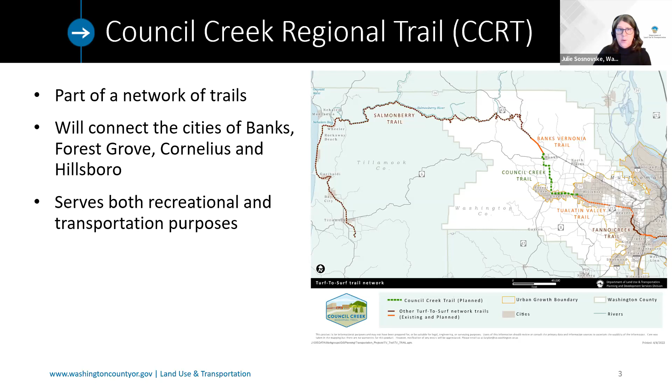I think we went through the meeting purpose and outcomes. Just a brief overview again, most of you have seen this: it's the Council Creek Regional Trails. It's part of a network of planned trails that will lead from the Portland metro area to the coast, serving both recreational and transportation purposes. We're working on the east-west portion of the trail leading from downtown Hillsboro, the Hatfield Government Center MAX Station, through Cornelius to almost Pacific University in downtown Forest Grove, running about a quarter mile north of TV Highway on the abandoned railroad line.

Reminder about the project timeline and funding. We're midway through the preliminary design project. We have a $1.5 million grant from the Metro Regional Flexible Fund Allocation Grant, hoping to wrap that up in 1 year, which is why we're having all these meetings fast and furious. Then we'll be moving quickly into our $17.5 million RAISE grant from the U.S. Department of Transportation, which will fund our final design, engineering, and construction. We also recently received another $6.3 million regional flexible fund allocation grant that has been confirmed—last time we met we weren't 100% sure. That's for enhanced crossings, pedestrian and bike crossings at arterials, collectors, and a state highway. We're looking forward to opening the project in 2029.

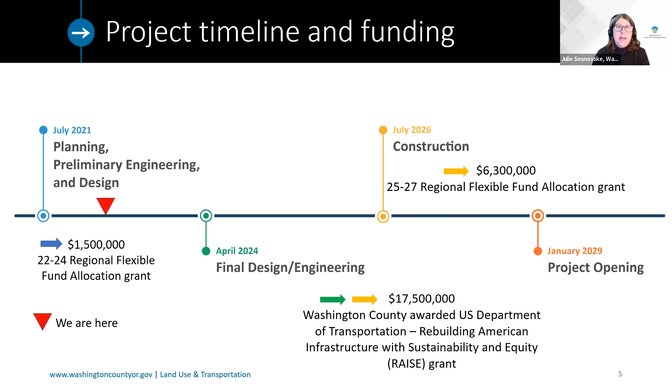Just a reminder, we have 4 major phases of the project. We started building the foundation, and now we're getting into defining the alternatives, hoping to select a preferred alternative early next year in February, ideally, and then moving into design and engineering to reach the 30% stage by the end of next year.

I want to keep you up to speed on what's happening on the project in terms of community and agency engagement. We'll be meeting with our stakeholder advisory committee for our second meeting on December 6th, in a couple of weeks. We're also planning an online open house and survey, hoping that will run basically the month of January—I don't have exact dates yet. We're also working on an in-person event during the open house to encourage people to participate in the online survey, likely at the Cornelius Library, but we're not 100% sure about that yet.

Also, we met with the Technical Advisory Committee on Friday last week, reviewing similar material to what you'll be seeing today, so I may chime in with some comments from things we heard from them as we go along.

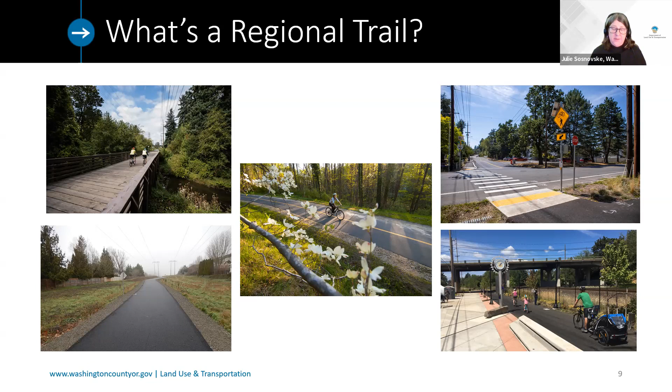And now we're moving into the next stage, which is the objectives. How can we meet the goals? The next phase you'll see later on will be design criteria and performance metrics. We won't be getting into that today, but we are going to present some draft objectives for your review and comment for each of the goals. So I'll read through these, and then maybe we can just stop at the end of each goal and see if anybody has any comments or questions.

So for goal 1, ensure equitable trail access. The objectives are to increase access for low income and communities of color, connect the trail with employment centers, education centers, public and health services. Design a trail that is welcoming and comfortable to people of all ages and abilities and new trail users. The presence of all ages, abilities, genders, races, ethnicities, and income levels are generally indicators of a healthy, successful environment. Provide seamless accommodation of universal access.

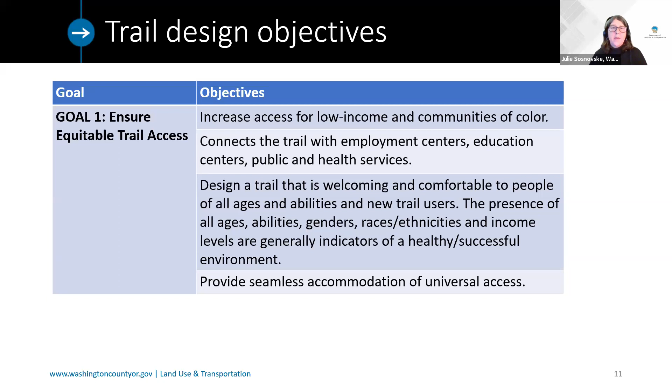Any comments, questions, proposed changes? I'll move on, and then we can talk about it at the end too if there are more comments.

Goal 2, create a safe and enjoyable user experience, with the objectives to provide safe crossings of streets by reducing conflicts with vehicles, design the trail to accommodate emergency vehicle access, provide for eyes on the trail and visibility including clear sight lines, provide enough space for people to move through the corridor at different speeds. People cycling are not in conflict with families walking. Identify opportunities to create gathering spaces and shade. Create a trail that is efficient to maintain over time.

Questions? Yes, Councilor Rippey: we don't have anything mentioning here about lighting of any kind. I think in terms of safety, there needs to probably be some criteria around lighting in particular spots.

That's a good question, and I might defer to Adrian on that. Is that something that would be more included in the design objectives when we get to that, or is that something that we should be including here? That would be in the design objectives. I think creating a safe, we could mention it as part of the goal to create some safe environments, but typically that is more on the design side. Yeah, I think going back to the slide, this is more about what are we trying to achieve, and then the lighting would be the way that we would achieve it, I think.

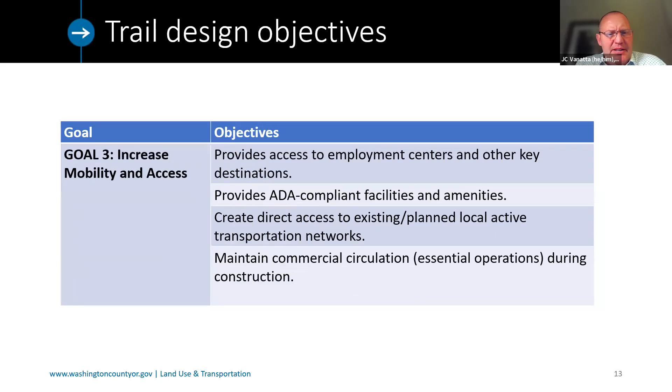JC - Julie, could you go back to the safety one? If you wouldn't mind, just go back. Sure, and I'm not trying to - this one? Yeah.

I think the other piece I wanted to add was to develop partnerships to ensure the safety of the trail. I say that because the Springwater corridor in Portland has a lot of crime and houselessness issues. So I think it's making sure we develop partnerships with community groups, law enforcement, services, community services we can rely on to help. Obviously they share in the burden, but just another note as we want to develop this trail to be the best it possibly can be. So just my couple of notes.

I think that is an excellent idea. I think that might fit more into when we get into the implementation and management of the trail. Here we're talking more about design objectives, but excellent point. Got it, thank you. Yeah, and it has an existing homeless problem in the area I've surveyed already, right? So...

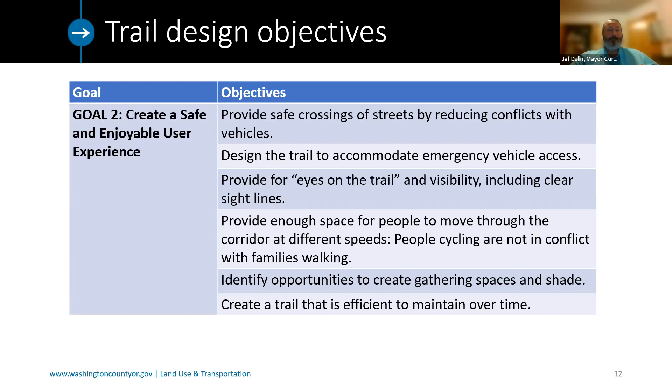Any more questions on these, or should we move on?

So I want to talk a little bit about where we are in the project, because I think we're all kind of jumping ahead on where we are in the trail design process. This was a little confusing to me, and the consultants helped me organize it in my head. I hope these slides help you organize it as well.

Right now we're making trail alignment decisions, which we're hoping to make early next year in February, winter 2022-23. We're talking about it now and hoping to make a decision early next year. This is a high-level evaluation and risk assessment, and what we're trying to identify is the alignment that's feasible, that we can construct and that best meets the project goals we've discussed.

Once we've identified that alignment, we'll develop it in further detail, which we'll talk about in the next slide. We've outlined this process, and I think we introduced it last time, where we've broken the trail alignment into 6 segments, which you'll see in Adrian's presentation. Within each of those 6 segments, we want to decide whether the trail should be placed in the north, center, or south of the right-of-way, and what makes the best sense for each segment and for the trail as a whole through the corridor.

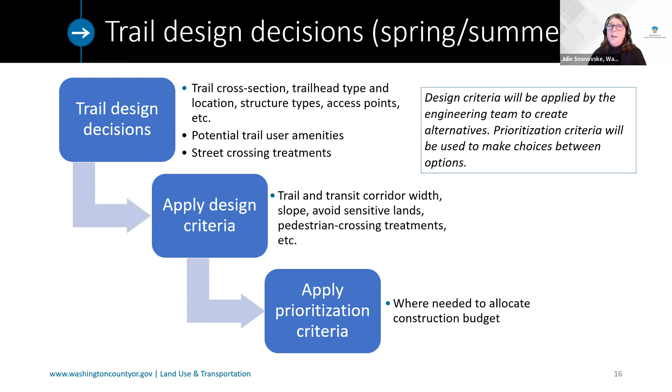Also the trail width, how we're avoiding sensitive lands, and looking in more detail at pedestrian crossing treatments and that kind of thing. Then we'll be applying prioritization criteria that we're working on, so we can determine where to allocate our construction budget. We only have so many dollars—what is the best trail we can build for those dollars? So that's just a preview of where we're going.

Bringing us back to where we are now: we're looking at the trail alignment, which is where do we want to put the trail within the corridor. Our tier 1 is prioritizing trail implementation, and some of the criteria we've come up with by segment are cost, feasibility—which could be based on a number of factors—trail user safety and comfort, environmental impacts, schedule implications, right-of-way impacts, and utility impacts. These are the first things we're going to consider with the goal of getting to construction in 2026.

The next tier would be to optimize trail and transit feasibility. Criteria we could use would be avoiding overlap between where the trail and transit would go, or minimizing future trail relocation if we decide that's what we want to do.

Does anybody have any questions on these past couple of slides?

I'll tell you what we're going to do next. Adrian has a presentation, and he's going to go through at a pretty high clip the corridor and identify many of the conflicts and challenges we might have if we push the trail to the north or the south, and also what it looks like if we put the trail in the middle. Feel free to ask him any questions, or if you have more questions on these before we move into that, that'd be great.

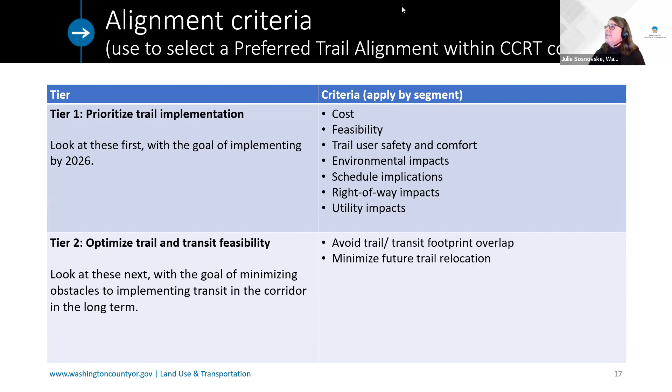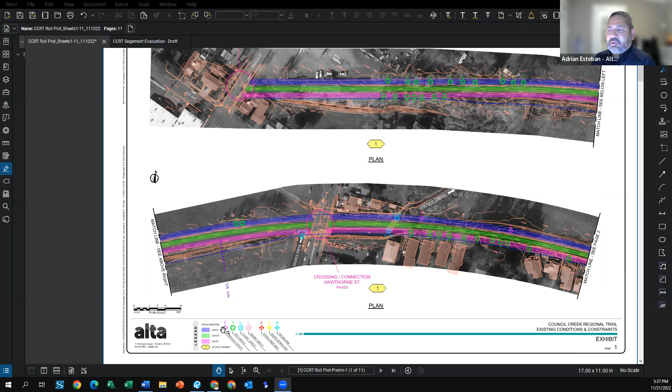All right, so I think my screen should be visible. You should see similar plans to what we went over last time. As Julie mentioned, at our last meeting we went through and looked at the corridor and identified some of the constraints, so I'm not going to go into a lot of detail. I'm going to point out specific areas where we may want to focus. I'm going to zoom in here into our legend to give you a sense of what you're going to see on these plans. There was a link to these plans on the agenda, so you can go on your own time and take a closer look. What you'll be seeing is three alternatives: north, in this purple color; center alignment, which is the green; and the south alignment, which is this magenta pink color.

Along the corridor, you'll see these diamonds in P, which is a power pole conflict or utility conflict, and trees—you'll note there are a lot of trees out there, so tree conflicts. There are existing culverts under the railroad; depending on north or south alignment, we would have to extend those culverts. Grading conflicts will happen primarily near the trestle area. As part of the railroad, there was a grade increase to get up and over Dairy Creek, so there's some grade differential between the track and the north and south alignments. There'll be some grading needed there, particularly if we're looking at realigning as we cross over Dairy Creek. Encroachment areas were identified at our last meeting as well—we'll dive closer to look at some of those impacts based on the alignment. This yellow, which is a little hard to see, represents building setbacks. If you recall, there were some buildings right up on the property line, so those will need some sort of setback away from the face of those buildings. There's also some wetlands and bodies of water that will be impacted depending on alignment.

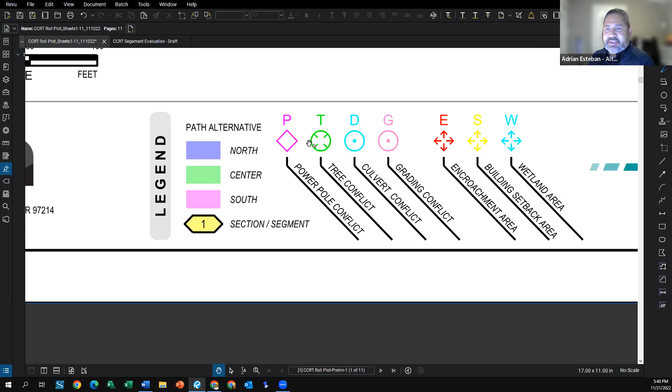Thanks, Julie. If you see any other hands, let me know, because I'm kind of focused on the drawing. I'll step back here and show—as Julie mentioned, we broke this up into 6 segments, roughly about a mile each, but there were some clear division lines and clear issues that were part of each segment. One segment was particularly focused on tree and power pole impacts, another was focused on items such as the trestle, and others may have property encroachments. We broke them out at good division points, as well as trying to focus on specific issues that may be impacting the project.

So segment 1—yes, at this zoom it's just a smear on the screen.

I'm not sure, maybe you've got an 85-inch big screen you're playing it on for yourself, but the rest of us human beings, that's pretty much just a smear.

Is there any chance we could get a little better zoom in? I'm about to zoom into that. I was just going to give a lay of the land here.

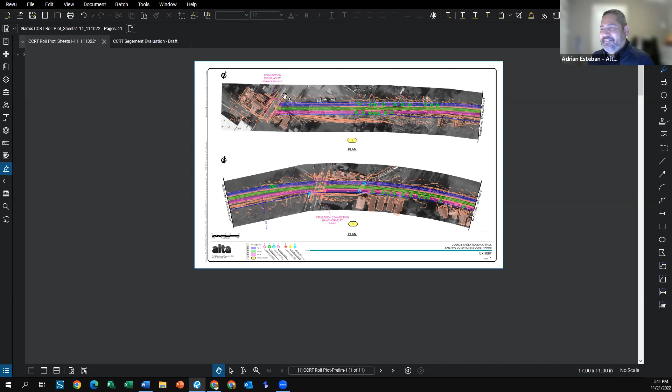So our first segment begins at Douglas Street here, and you can see the blue, the red, the blue, the green, and the pink. You'll notice we're seeing a lot of trees in this segment, both north and south of the railroad, which is typical through segment 1. We're going to see a lot of tree impacts through segment 1, these green T's.

As we continue to the east, crossing Hawthorne Street, this is where power lines begin to appear, overhead power lines. So through segment 1, there's a culvert here, but primarily trees on the south end, power line on the north end. That is the difference between the two alignments, and obviously the center is the railroad. So we're on the railroad alignment.

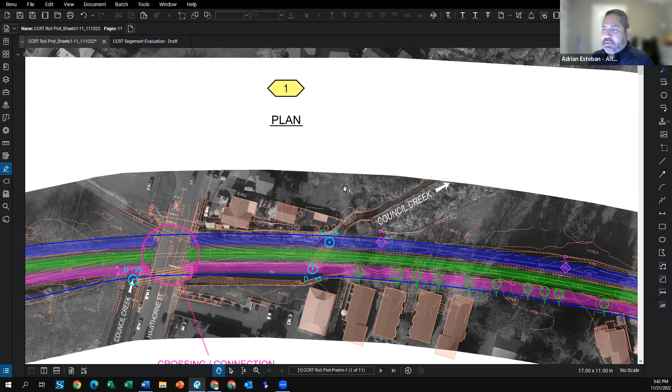One thing to note in this particular segment is Council Creek. Council Creek is on the north end, comes through these culverts, goes parallel to the railroad tracks to the south under Hawthorne Street, and then continues on the west side of Hawthorne Street.

So one thing to note in this particular location is that a shift in alignment from the center to the south would require some sort of structure to be directly over Council Creek. This pink area is where Council Creek comes underneath the railroad and parallels the railroad, and under the road back to its original location on the west side of Hawthorne Street. So that's a major impact. Just wanted to point that out, that we would be directly on top of where Council Creek parallels the railroad.

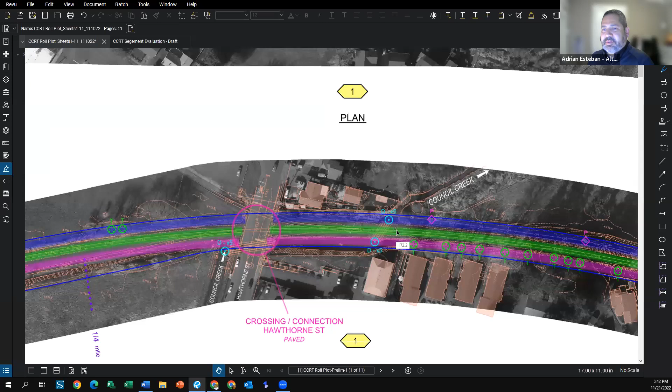I'm going to zoom out and go on to the next sheet, and I'll zoom into specific locations as we go.

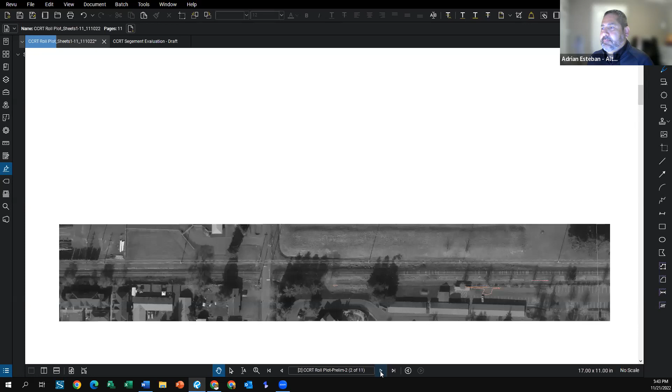As we continue to the east, we have one culvert, again power poles on the north, trees on the south. We do have to look at some encroachments that you're starting to see, and we noted those last time, about 90 feet of encroachment. Here, it looks like people are parking vehicles and they might be using this access around the property. No visible structures, but there is usage there.

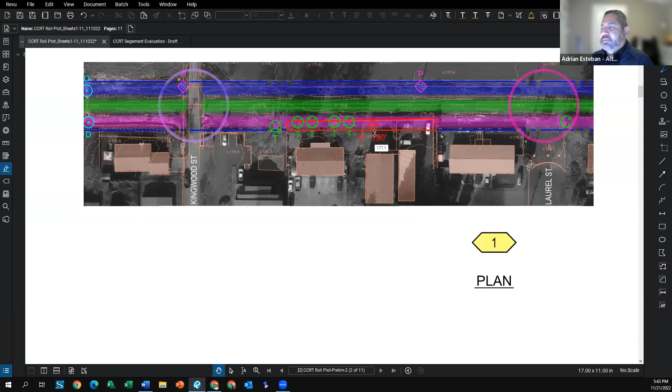As we continue to the east, again trees on the south part of the alignment, power poles to the north, another culvert. Street crossings will be the same regardless of which alignment. We'll have to improve the crossings there.

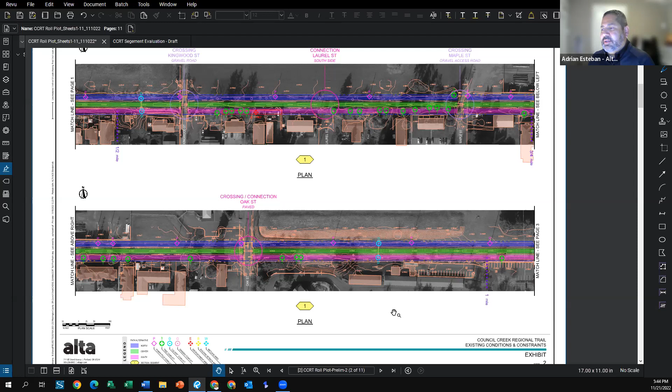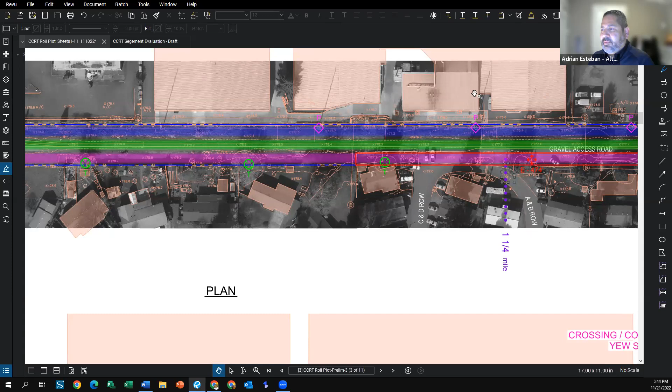As we get to segment 2, this is where I mentioned the division, Oregon Highway 47. This is where we start to get setback issues. You see the buildings that are right up against the property line. So still trees to the south, we have encroachments on the south side, and we've got buildings on the north end of this segment. So those are the things that we are dealing with.

And here we start to see some structures, just corners of structures that are on the property line, inside the property line. But definitely much more impact on both sides, north and south.

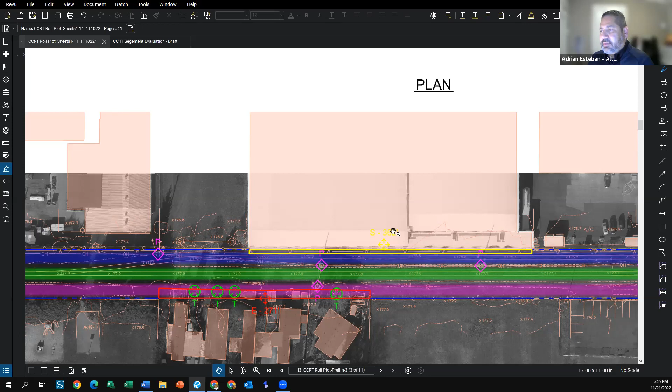Here we've got setback issues with the frontage of the buildings right on the property line. We've also got structures on the south side that were within the right of way. So this area to the south, where you see trees, you also see some small structures. And then north of it, we have not only power lines, but we've got buildings that are right up against the property line.

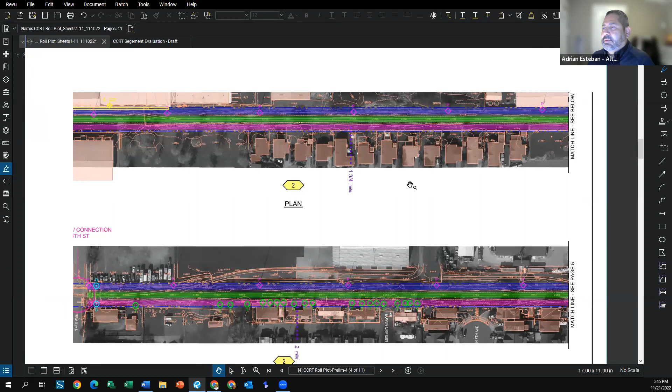As we head east, similar issues. We start to get into areas that have more residential. Again, power lines on the north, less trees to the south, but we're near property line with no encroachments. But we do have some on the north side, some buildings with setback issues.

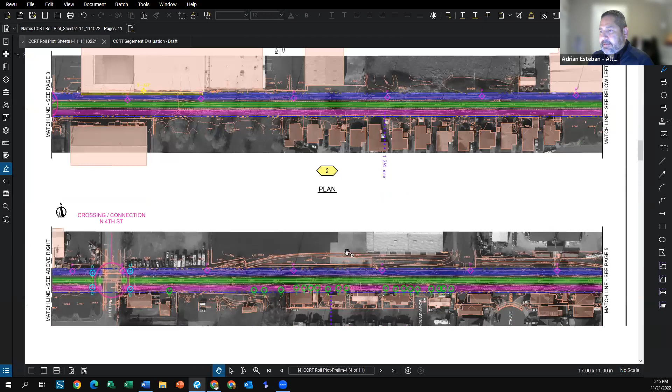As we continue east, crossing 4th Street, trees, a lot of trees on the south end, and then power lines on the north. A couple of culverts near the intersection there. So similar issues that we're seeing throughout the corridor.

And Adrian, those aren't just regular old power poles, are they? Some of them are high tension. They're really high voltage. I believe there's some areas that are high voltage transmission areas, not your standard residential power lines, it's a lot higher transmission.

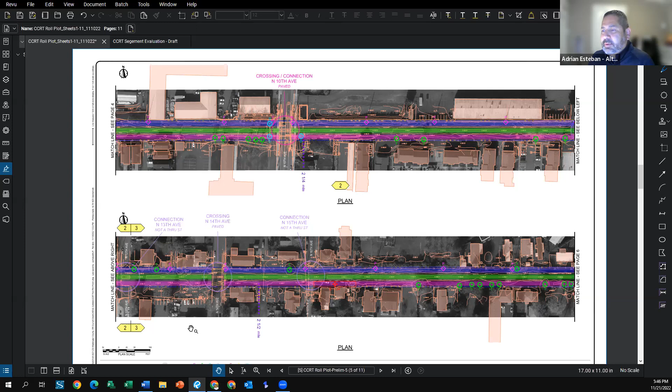As we continue through core segment 2, again, similar issues: proximity to existing buildings, trees, power lines. Then you'll start to note more residential, more high density areas as we approach segment 3, and we start seeing additional encroachments.

So in addition to power line on the north and some trees, we start seeing additional encroachment through segment 3, right around 15th Avenue. This is an area that looks like there are connections between the different buildings and structures that are there.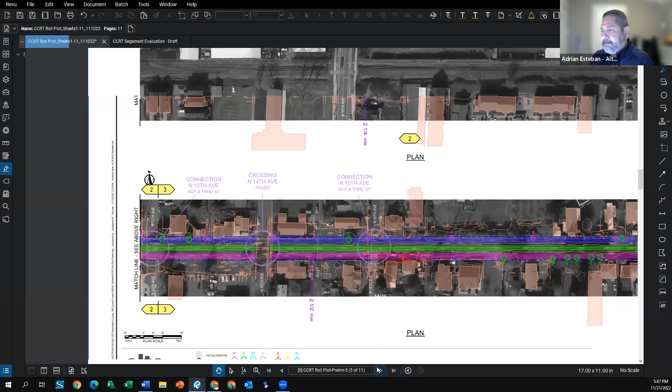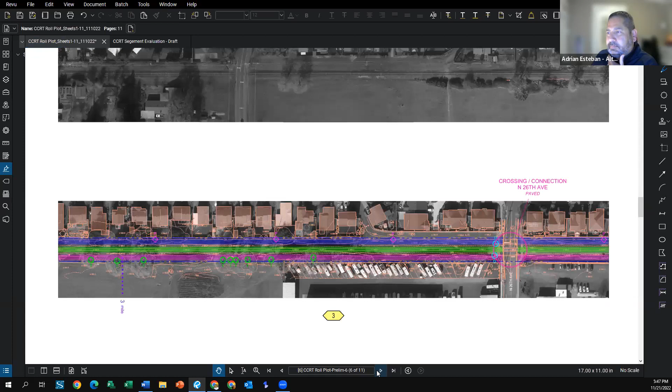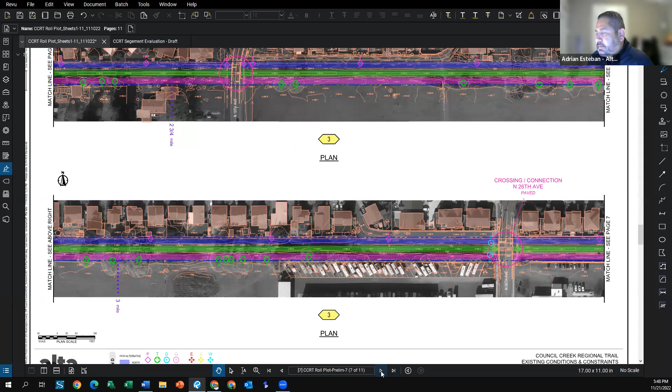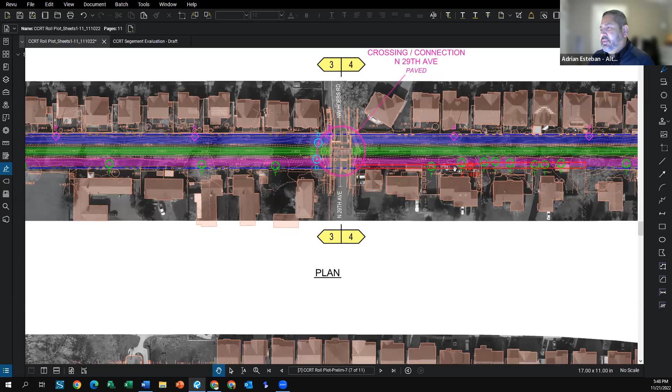As we continue segment 3, again trees on the south, power lines on the north. As we approach North 29th Avenue, there's a division between segment 3 and 4. In segment 4, we're starting to see a lot more density, a lot more encroachments, including some structures through this area.

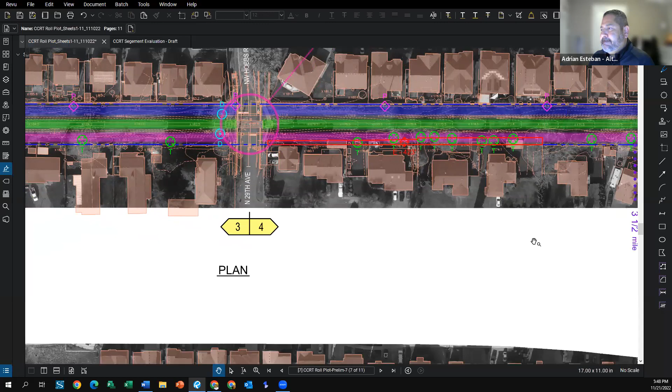So Adrian, if I could jump in here just a little bit, because I'm going to have to jump off in a minute. Those property owners that have structures and obstructions in the right of way that is not theirs, is that going to be their financial responsibility to move those?

Yes, I believe so. I believe they are within the right of way, so they would have to vacate it because they're encroaching. I think Julie had looked at whether they would be allowed to remain, and the railroad has the easement there, so they would have to be relocated, moved out of the right of way.

Yeah, there is a statute. If somebody wanted to call them on it, they would have to move what they have encroaching in the right of way because it is a railroad. Railroads have that authority, the county has that authority, and I believe the state has the authority. The right of way is owned by the state, but because it's an easement of the railroad, there's definitely authority at this stage. It may depend who owns it, but I believe all the entities likely to own it would have that authority to require them to move it. It doesn't mean it's easy to do.

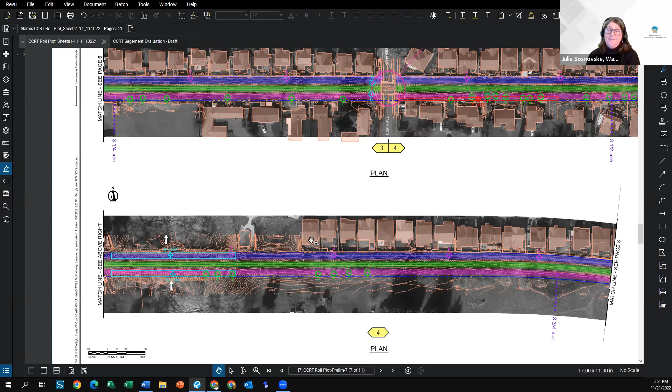So as far as notification, are we planning at some point reasonably soon to put everybody on notice that we're looking at trail alignment, possibly having to remove those structures? What's our communication going to be to put everybody on notice? Well, we haven't got there yet, and I'm not sure we necessarily would do that if we build the trail down the middle. I don't know, I would have to get instruction to do that.

I think we're going to have to dig in pretty deep on that and make sure we're in the right spot, because some of those on the north side, east side of 29th, those homes were built, and there may be some question of where the property and the easement actually is. On not just east of 29th, there's one minor structure in the right of way, and there's this home set back probably 5 feet from the right of way line.

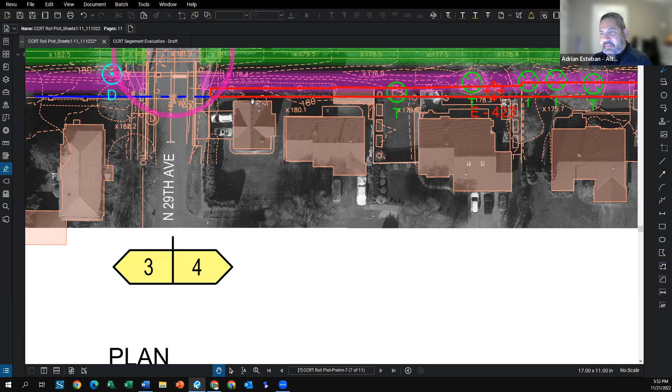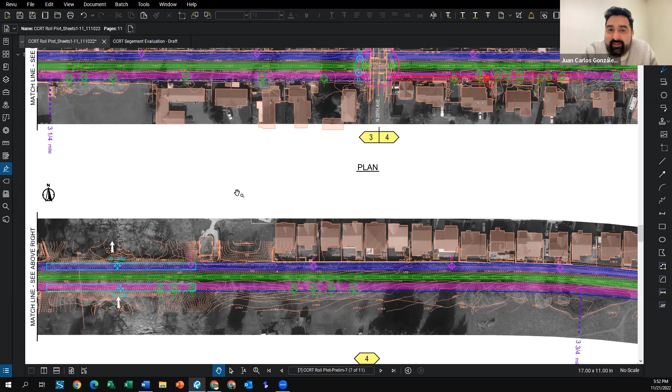If I could just ask a super basic question, one of the first projects that really gets into the weeds, parcel by parcel like this, how does this happen, just gradually over time? Obviously there's no nefarious intent or anything, but it's fascinating that there are patches like that.

That's why I brought it up, Juan Carlos. I think we may have a surveying error or something, because those homes were surveyed in and built by Loringer, a reputable builder in the area. That's literally my neighborhood, I'm just around the corner, just out of frame on this east of 29th area. So I think we're gonna have to dig in and make sure we're right when we ask this question, because all of that was surveyed in and it's all part of the record. We need to be 100% sure on where the line lies before we start stirring this pot.

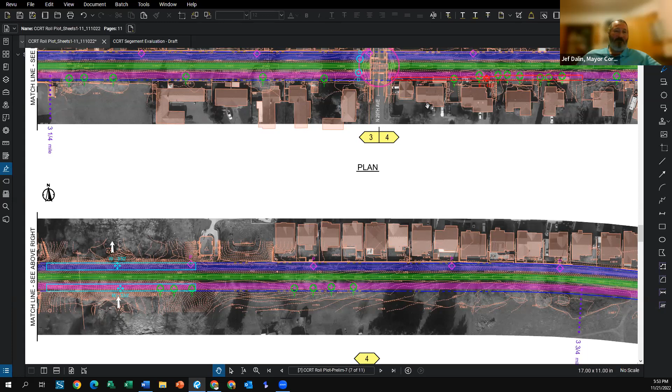Just so you know, the survey that was done used a lot of the survey records that are out there for the easement. But I agree that we want to double check and confirm that.

One last question before I jump off. If we chose the rail line itself, which in this slide would be green, would we incur significantly less issues along this line initially in building the trail, and then 10, 15, or 20 years from now when we want to add other multimodal elements, we'd have to deal with those then? That's correct. That's possible if that's what we chose to do.

It's a choice we could make. But we're not making that decision today, right? We're not saying we're going to choose A, B, or C.

No, all right. Well, thank you very much everybody. I'm sorry I have to jump off, but I appreciate everybody's attention to this. This is obviously a great project, but it has some complications as well. It's no different than the Salmonberry Trail, quite frankly. We've got encroachments all up and down the Salmonberry that we're going to have to deal with as well. So thanks everybody, I'm going to leave you now and turn it over to Mayor Dalin.

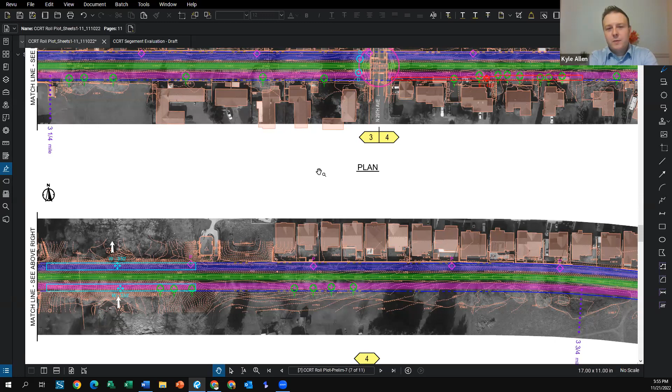All right, thanks. Looks like we got a question from Kyle. Piggybacking off what Jerry just said, it seems like most of the structures in the right of way are coming from the south. So if we focused the trail on the center or center-north, and were to build it, you mentioned the authority of the railroad is probably greater than the authority of the state. Would we put ourselves in a situation down the road where we wouldn't be able to ask those folks to remove structures in the south if it wasn't the railroad's right of way anymore?

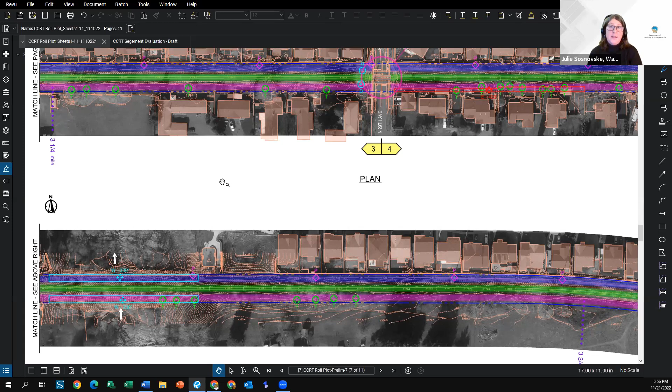I don't think we know who will own the right of way. I know the county has the authority if the county owned the right of way. TriMet has the authority if TriMet owned it. I believe the state has the authority too, although I'm not positive about that. So most of the entities likely to own the right of way would have that authority.

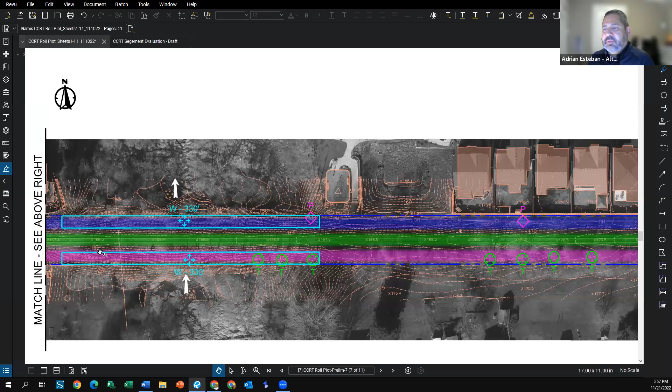All right, thank you. If there are no other questions, I'll continue through these segments. We're now in segment 4, east of 29th. We showed those encroachments, but we also have some wetlands we're dealing with, about 330 feet north and south of the existing corridor. This is an area with environmental impacts, and we have to do mitigation for any impacts to the wetland. It may require a structure like a boardwalk to minimize impacts to the wetlands.

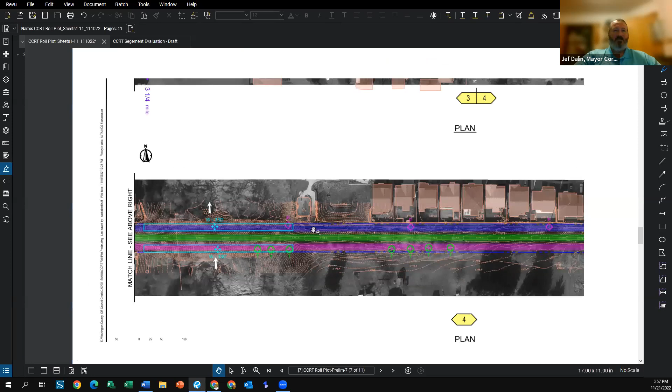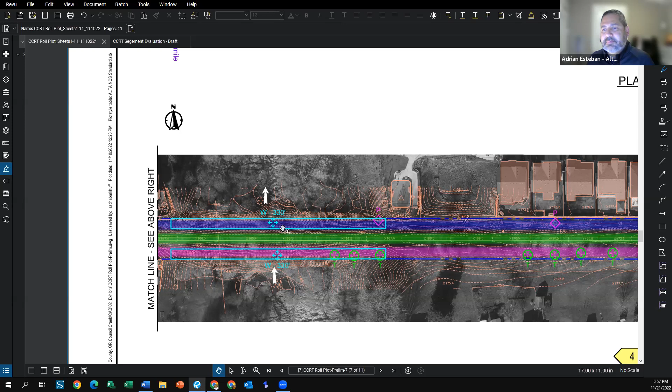And that's where the first trestle is, right? Or what are we considering that? This is Job's Ditch, and there's an existing culvert that goes underneath the railroad, so there's wetland on both sides. The trestle is further over to the east. Right now the only structure here is a culvert.

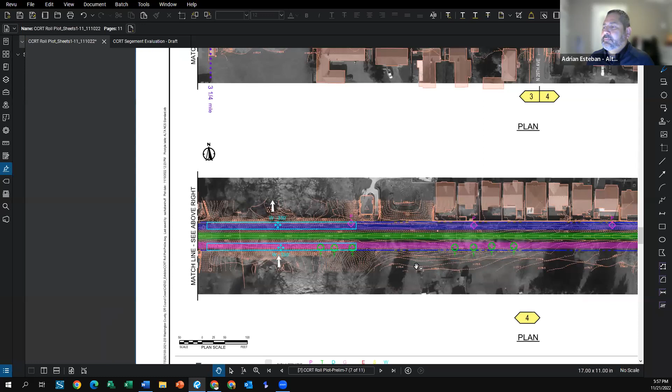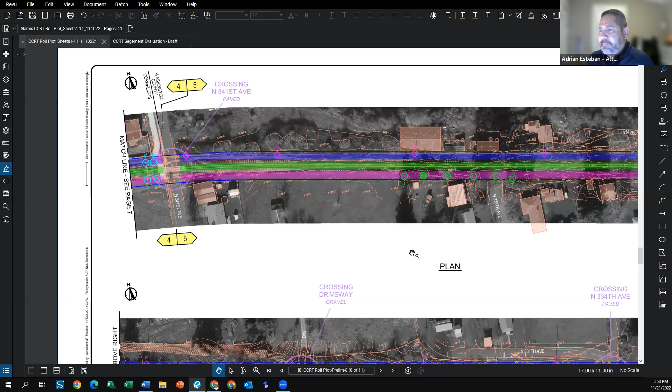So segment 5 starts at 341st. This is where we start approaching the trestle that was mentioned earlier. In this segment, we've got the same power lines to the north, trees to the south, and it starts to become less densely populated.

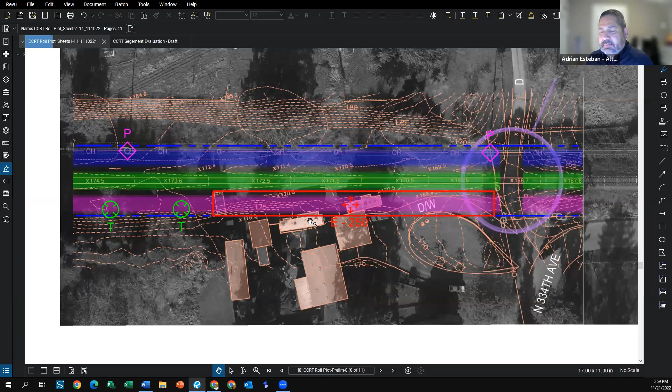There are some encroachments to the south as we approach 334th. There's a structure, I think a mobile structure, possibly a mobile home, that can obviously be moved but is currently placed within the right of way. There's a dirt road providing access to this area, so somebody is clearly using it as an access road through this property. There's another structure here slightly into the right of way, which I think is also temporary or at least a minor structure in the right of way.

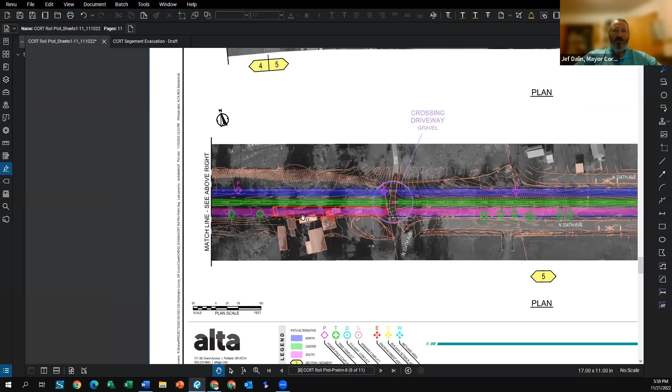And that other one, what's a corner of a garage, I think, that sticks into the property? Yeah, from being out there, I think it's some sort of temporary structure, maybe a mobile home, that is encroaching into the property.

But that one just to the right of it there? Yes, I think he's talking about the one under the E250. This one here, square, yeah. There's a corner of that building, this corner is in there as well. And I can't remember if this is a shed, like a metal roof shed.

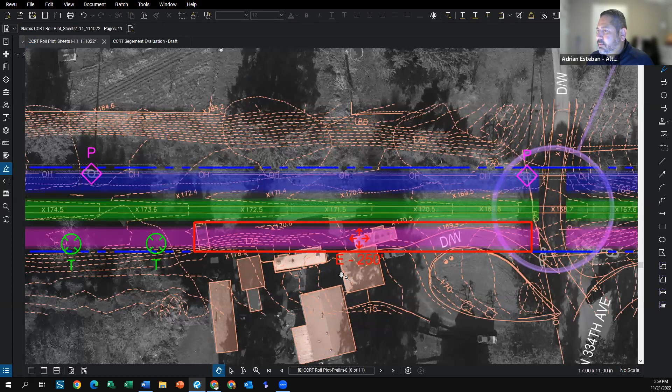And then we've got the driveway that goes underneath it right next to it, right? Correct.

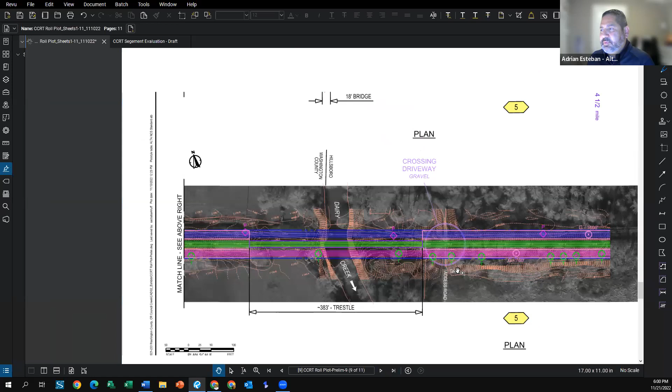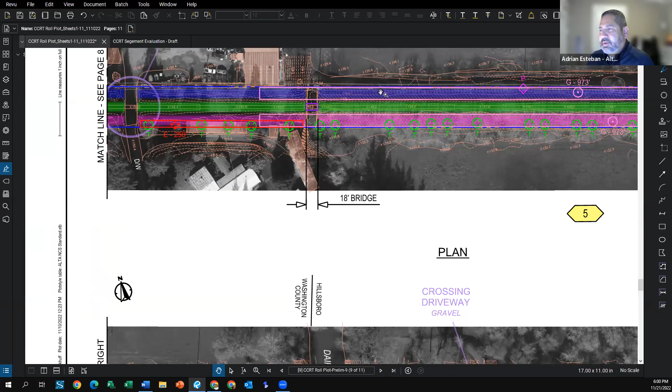So Dairy Creek, this segment 5, as we approach the trestle, we have a short bridge. There's an existing structure now along the railroad line. So if we were shifting north or south, we'd have to provide a new structure. There's also the area just to the north and south of there.

This is maybe potentially wetland or sensitive area as we approach Dairy Creek. And a lot of trees, you'll note, to the south.

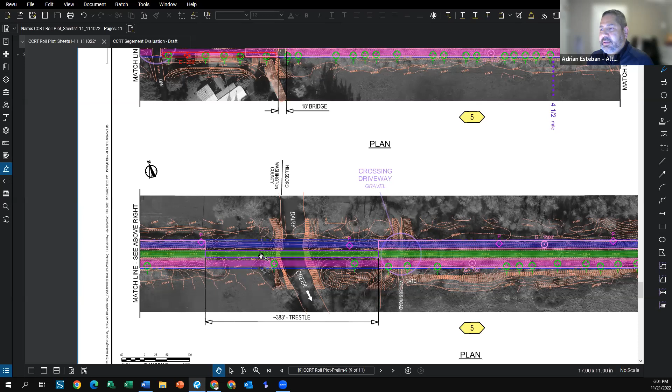And then Dairy Creek, as we approach it, there's a 383-foot trestle existing here in the center of the right of way. That, as was mentioned previously, would require upgrades to be able to utilize it. The structure is many years old, many decades old, so obviously there's going to need to be improvements in order to utilize the existing structure.

This is where, when we're looking at something like this, where you're going to spend a lot of money to upgrade an existing trestle, its useful life may be limited because of what's already there. And even if we do upgrades to it, there's still going to be some limits to what can be done. This is an area where you'll have to decide, does it make sense to shift this north or south, put in a new structure?

One, obviously a longer lifespan, but also if we're going to take the expense of building on top of the existing trestle, would it make more sense to shift it north or south? Also providing for high capacity transit in the future, not to have to reconstruct a structure. Those are the things that must be considered.

If we maintain the existing alignment, at some point that will have to be removed if there is high capacity transit in the future. And the north side, those diamonds are the power poles, and the trees are on the south? Correct.

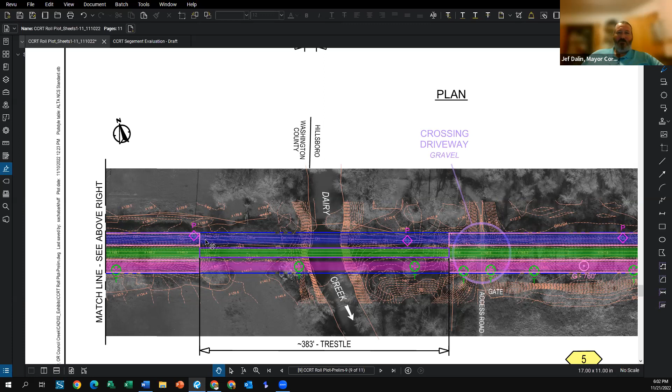And then the other thing we'll look at too as part of the design, depending on the alignment selected, is if we go north or south, we'll do some grading, and that's what that pink box is. I thought it was wetland, but no, that's grading.

As the railroad had to increase to get up and over the creek, there was some severe grading that happened through here. So north or south, there's quite a bit of grade difference between the railroad line and the existing grades. So there would be a similar type of grading that would have to happen to get up and over to put a structure over the creek.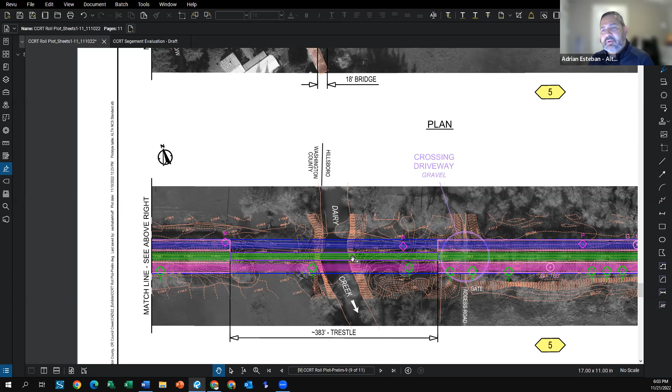So there's a minimum clearance that we'll have to have over the creek with our structure. So through this area, where we have the 18-foot bridge, we'd have to slowly start to grade up and over Dairy Creek.

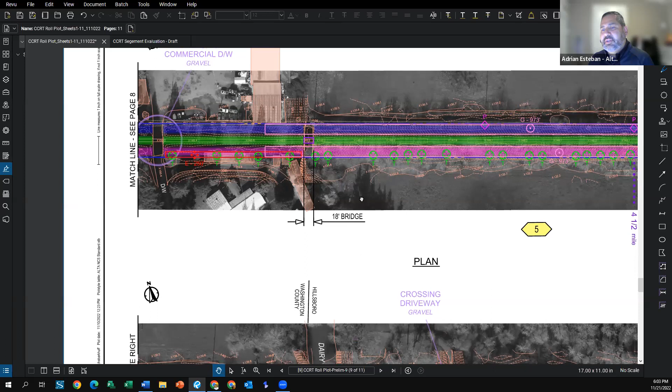So segment 5 is dealing with structures, potential structures, new or refurbishing existing structures. And then we start approaching Hillsboro.

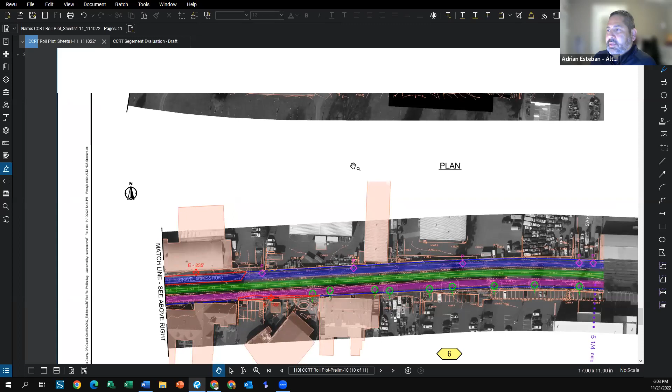Again, trees and power lines to the south, some grading that would happen. On the north side, there's more grading that needs to happen based on the grade differential that's there now. Start approaching commercial buildings.

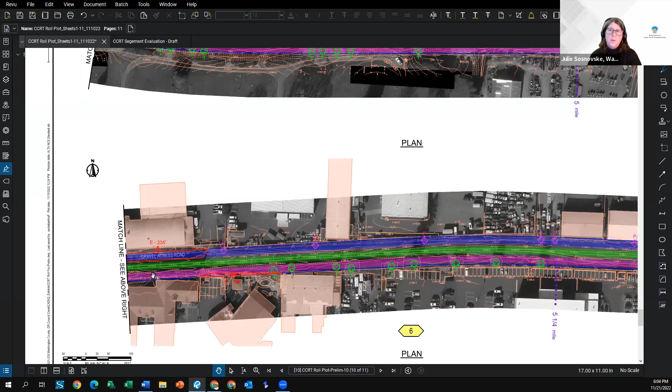With those grading issues, Adrian, is it possible that we would get into needing right-of-way easements adjacent to the right of way if we pushed it north or south? Correct. So depending on the grading that needs to happen, there may be structures such as retaining walls needed to avoid going into properties and needing easements. But because of the grading situation, there may be additional structures that are needed.

And then continuing on from segment 5, that ends at Main Street. Segment 6, the final approach.

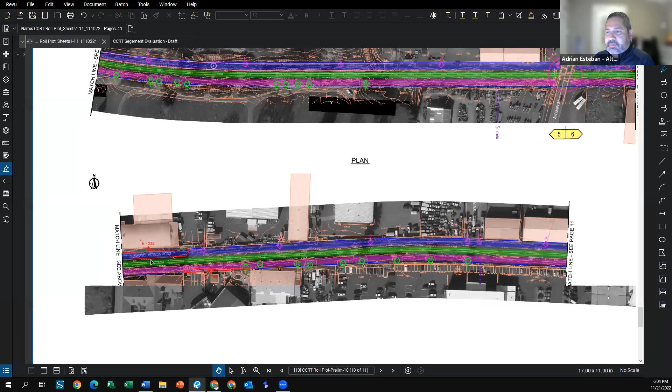We have a gravel access road that's being used for access to this commercial property. So there's a gravel access road here that is in the right of way, and then we've also got some minor encroachments as well on the south side.

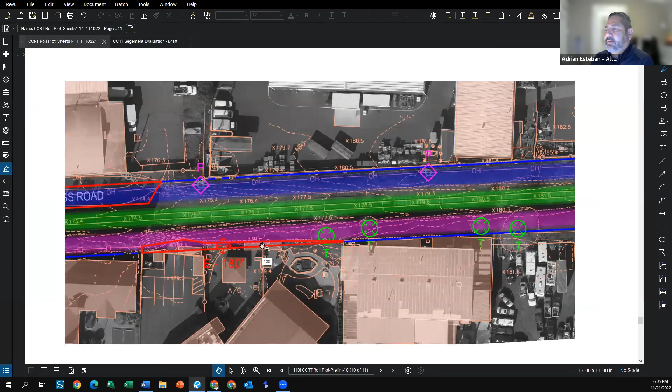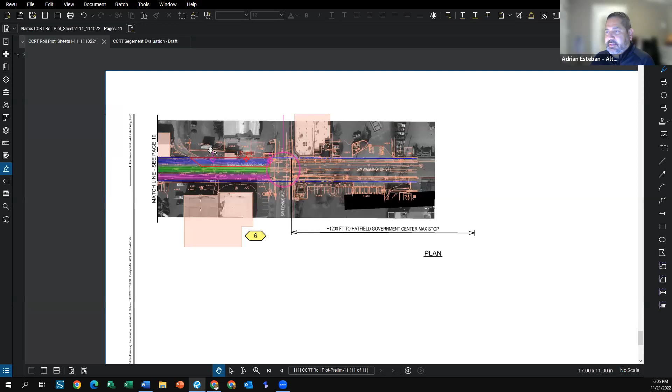And as we continue to the end of the project, again, there's a gravel access road connecting here that's in the right of way on the north side of the corridor. And that is our corridor. Any questions?

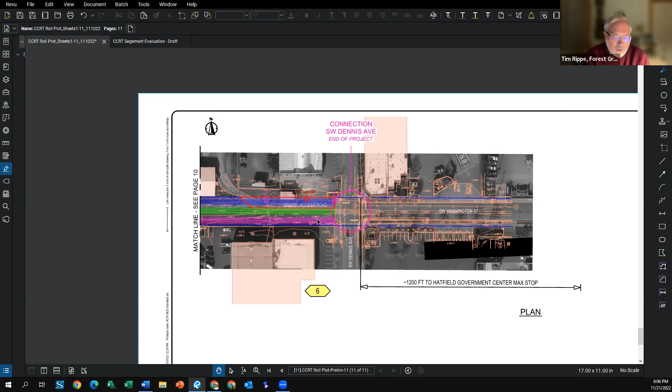Thank you, Adrian. A couple questions. How much of an impediment really are the utility poles? Are they so obstructive that trails couldn't go around them?

There's opportunity to go around power poles. Through that, we'd have to obviously realign around them. That's not an impediment to go around power poles with the trail. It would just require that we move towards the center line. In areas where we have serious grading, that might require retaining walls and other structures through there.

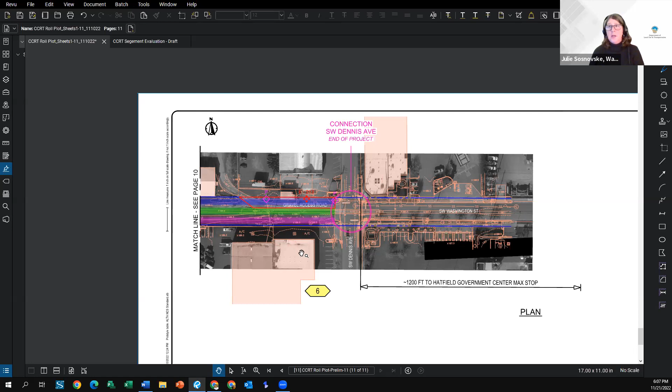Right. So Julie, are we looking at having separate trails, one for pedestrian and a separate trail for motorized devices? I can't say that, but I think given the amount of funding we have, we're probably not looking at that for this project. That doesn't mean that couldn't be possible down the line if we wanted to seek further funding.

Okay, so that sort of precludes my last question. You had mentioned earlier about crisscrossing, and I was just curious what that might look like. I know it's a little premature for that, but I'm just trying to get it into my head what it is we're trying to fit into this space. When you mention moving it up and down, north, south, or center, then there would be some crisscrossing going on, and I don't know what that would look like. How would you actually achieve that? So, okay, thank you.

Any other questions? Yeah, about how many feet is each line? Is the green line about 20 feet? You mean width? For each, sorry, of the, yeah, we're assuming about a 20-foot width. It's a 60-foot corridor, so we're about 20-foot width.

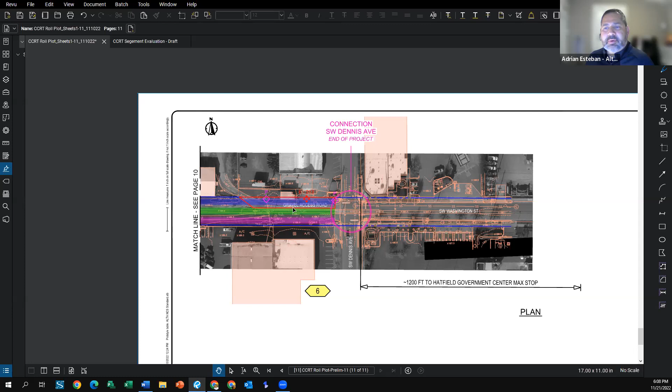So this graphic gives you a visual of all of the different impacts by segment. And so what Julie was mentioning, which I'll share now, is we have summarized it in table format to give you a better sense of, by segment, north, center, and south, what the major conflicts are throughout. So we've got culverts, we've got wetlands, and you can visually see in this table the difference between the three different segments, three different alignments by segment. So this kind of summarizes the graphic into a table.

As part of our process, we will be looking at something that was asked earlier, what really is the impact of the power poles, and how do we correlate that to having to build structures or retaining walls from a cost standpoint. So the next step, as we continue to develop this, is to really put sort of an impact, not necessarily a cost or dollar value, but more of a sense of what one impact is compared to the other and how they relate.

Which one is more costly? It might be more difficult than others. Extending the culvert is something that may not be as difficult, or as costly, as having a 300-foot retaining wall by going to one side or the other. So as we summarize this, we're going to start looking at being able to provide you information to make the decision between the different conflicts and what's more impactful from a dollar standpoint, from a cost standpoint, from an environmental standpoint. So we'll find a way to show that to make it easier for you to understand.

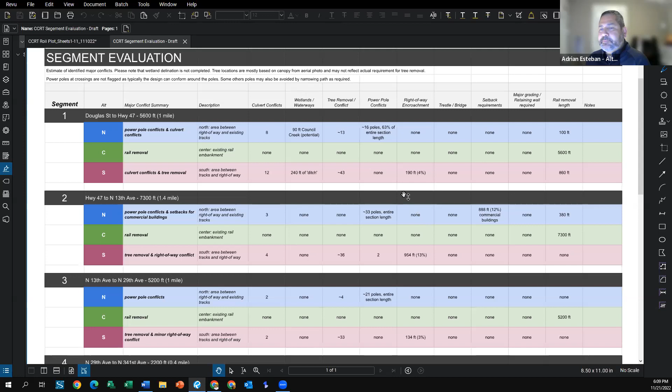So this table just summarizes segment by segment. It gives you the limits of it, and like I mentioned, all the different impacts and comparison between the three alignments.

And basically on the center one, it's almost uniformly just pull the rails, pull the ties. Correct, for the most part, that's the corridor. The main question will be when we get to crossing Dairy Creek and other places where we would need structures or upgrades to existing trestles.

Yeah, like Forest Grove just paved over the railroad recently. Or ODOT, I'm not sure if it was ODOT or Forest Grove. But 47's now buried the rails. Forest Grove, I believe, did that, and that was with permission of the railroad. I was just surprised when I drove over that the other day. I went, wow. Well, I think we're closed officially.

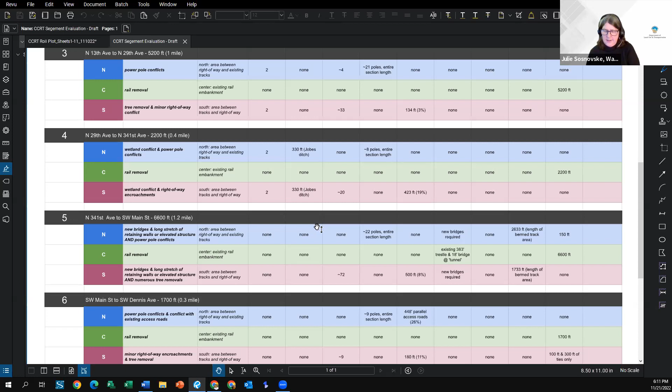I spent 4 months getting a permit to walk on it, and I saw the emails back and forth where they're like, 'Oh yeah, just pave over it.'

So that is my presentation. If there are any questions, I'm happy to answer, and if not, I'd like to open it up for discussion. We want to make sure we had time to dive into some of the questions asked earlier and get some feedback and thoughts.

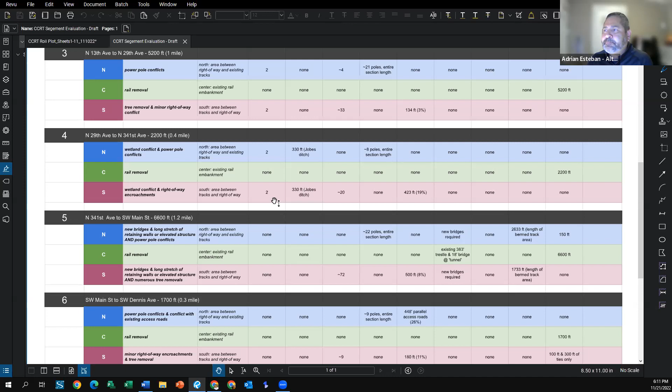Team, questions, comments? I guess I have a comment, not a question. I kind of mentioned it earlier, but my preference is long term to use as much of this right of way for the public good as possible. So I'd like to see us not just use the center line, but probably look at the center line and the north line with the south, not really a part of this project, but thinking way in the future, maybe that would be something for high capacity transit.

Well, we say high capacity transit, but what does that mean? If you'd asked Mayor Truax and I 20 years ago, we thought that was going to be an extension of the MAX from the government center. Maybe that's not even it anymore. Maybe it's a busway, who knows? I don't know what that will be, but I do think long term it should be for the public good, for transportation of some kind. But that also gives those places that have structures decades potentially to address that.

Others? Yeah, Juan Carlos. Thanks, Mayor. Well, I really enjoyed the presentation today, and I gotta say, Adrian, I really admire and respect your attention to detail, and the entire team that put together the map. From a Metro perspective, we support a trail alignment that is cost effective and delivers the best trail experience for folks into the future.

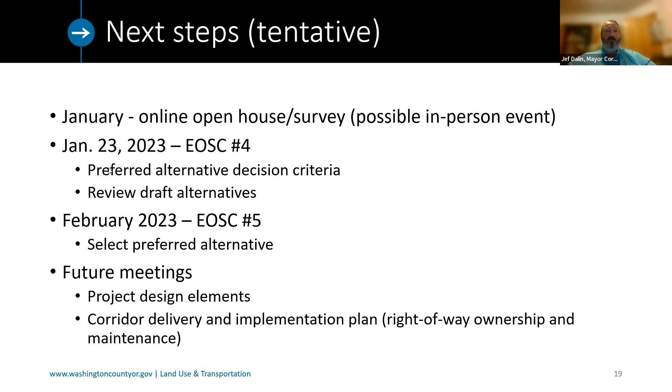Okay, Julie, turn it back over to you for next steps. Yeah, and I'll just say quickly that the TAC had similar comments. Some people on the TAC said just build it, get the trail built, and some people said let's not make it harder for transit in the future. So we heard both of these arguments from the TAC as well.

Just a reminder that we're planning to do an online open house and survey. We'll be reaching out to staff at your cities and jurisdictions to share that information. I think we'll be having our next steering committee meeting on January 23rd. It's looking like most people are able to attend. February is going to be more challenging, so it's really important to provide alternates. We want everybody represented at these meetings, and then we'll be having future meetings dealing with more design elements and corridor delivery and implementation. But immediate decisions are to get in alignment so we can proceed with a preliminary design. That's all I have.

Julie, did we have a December meeting also in there? No, we decided that was just not going to work. Too many conflicts. The problem with January and February, we've been meeting on the third Mondays, and the third Mondays in January and February are holidays. So trying to find an alternate time with vacations and other things, it's going to be challenging, but we'll figure something out.